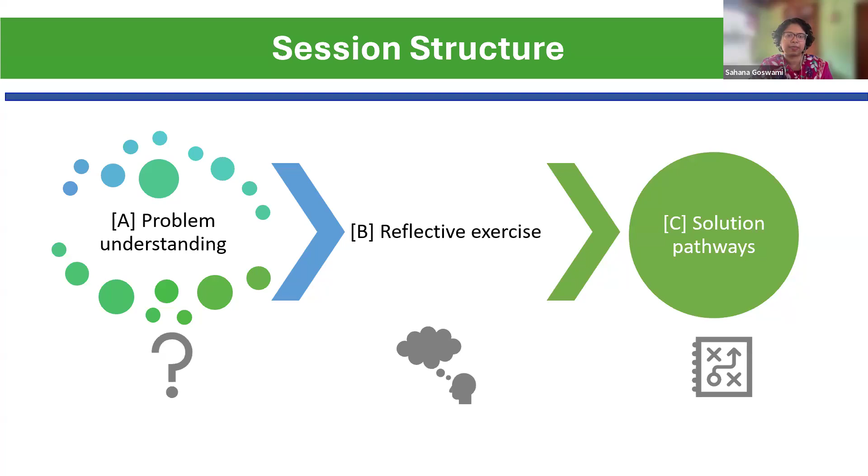To understand flooding in cities, we need deeper insight into how climate change, the water cycle, and urban areas intersect, impacting stormwater flows in surface and underground areas, both human-constructed and naturally occurring. At the nexus of climate, urban, and hydrological factors lie dense population centers, particularly in our global south regions, exposed to extreme rainfall and increased flooding due to impermeable surfaces, with subsequent exposure to water and vector-borne diseases from contamination of drinking water and sanitation services.

To delve deeper, when we talk of climate uncertainty with regards to climate change, this refers to the difficulty we have in predicting its consequences. Particularly with rainfall, which is the root of stormwater issues, we are limited in our ability to accurately predict when and how much rainfall a region will receive. This impedes people and urban system operators, like bus and transit operators, in being adequately prepared.

Climate change is also causing an intensification of the hydrological or water cycle. This happens in a variety of ways, but primarily we have warmer and wetter conditions across the world. Climate change driven global temperature increases are increasing evaporation rates and precipitation volumes. With more evaporation, there is more water held in the atmosphere, and the storms produced are highly intense and can cause extreme rainfall in many areas.

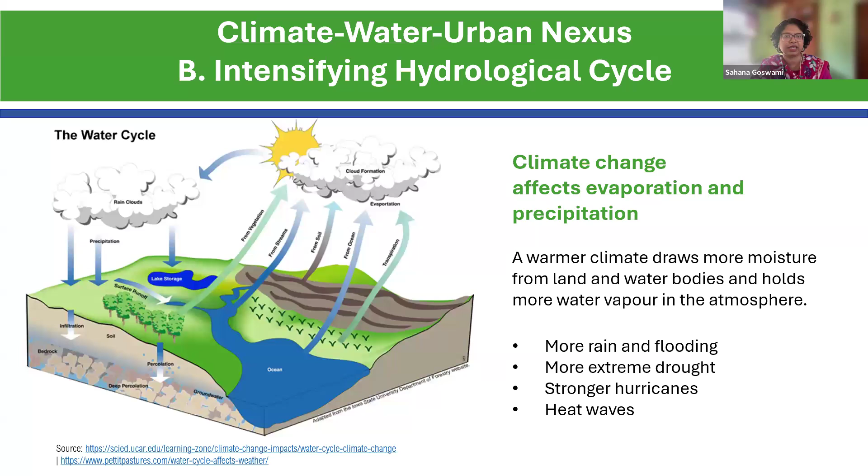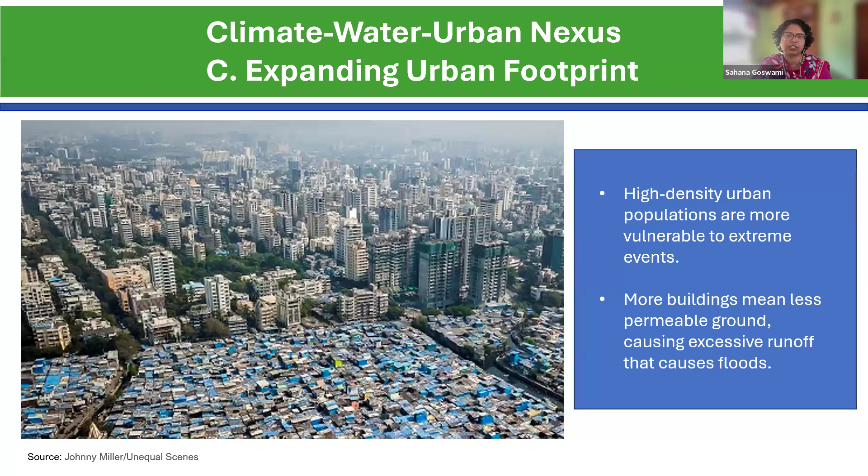The third layer we look at is rainfall falling on cities. Cities are concentrated population centers in relatively small areas, so we have really high densities. Because of this concentration, the number of people affected by an extreme event like a flood is very high. So one single extreme rainfall event, or multiple days of moderate to heavy rainfall, will impact a much larger number of people in dense urban centers compared to sparser rural areas.

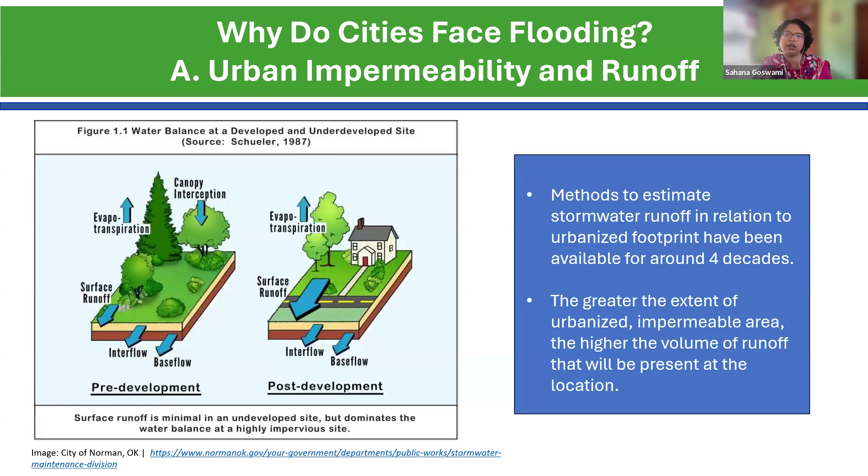Over the next few slides, I'll take you through exploring how the urban footprint specifically contributes to flood conditions in our cities. We start with impervious areas, the primary characteristic of most of our cities. This is all land area covered by buildings, pavement, roads, gravel, or any other material that will significantly inhibit how stormwater penetrates the soil.

A range of studies help us identify that the percentage of runoff generated is based on the type of surface. Not just tarred or concretized surfaces, but even compacted earth or bare earth, which you get after clear cutting woodlands or preparing a site for construction, also has very high runoff coefficients. This is a condition very common in our global south regions where cities are still being developed.

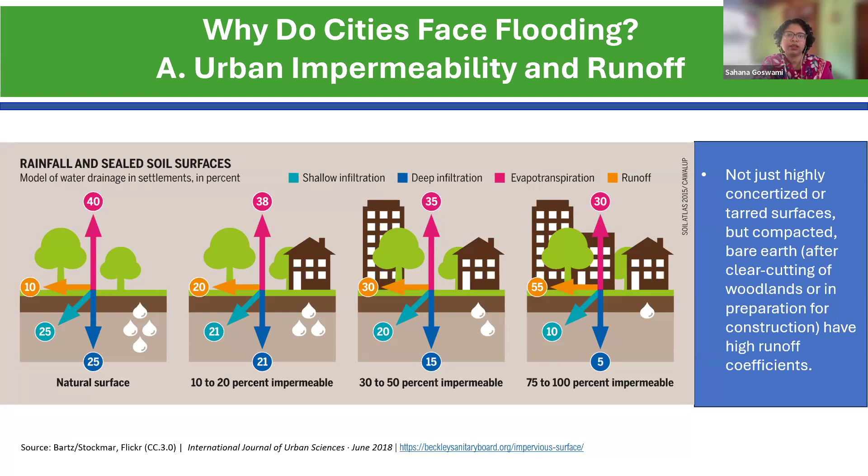Runoff coefficient is the number that compares the amount of runoff we see to the amount of rainfall. Essentially, it's a measure used in hydrology to understand how precipitation is transformed into runoff. The other terminology we often use is runoff peak, or peak runoff, which is the highest rate of runoff that will occur after a rainfall.

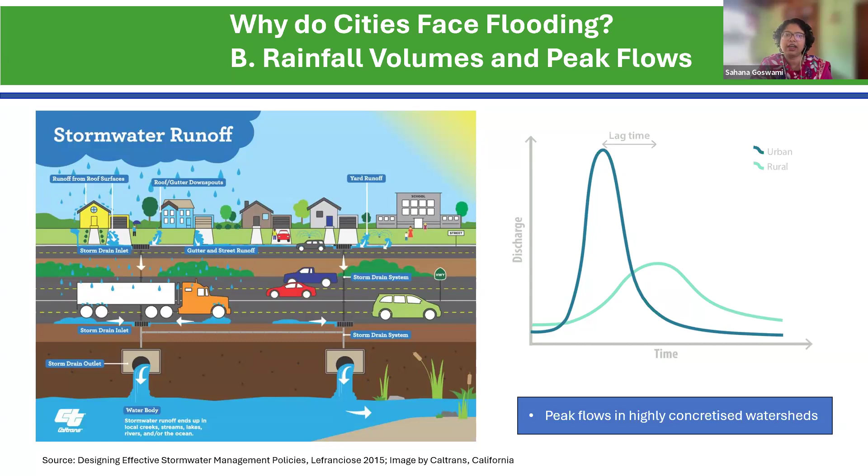We all know a lot of our urban development happens outside of our municipal boundaries. So this rapid urbanization causes more impermeable surfaces, leads to faster peak runoff and increased runoff volumes, and places an immense strain on existing drainage capacity.

Alongside erratic extreme rains and the impermeable surfaces because of our cities, a very fundamental reason for urban areas to flood is that we have built on areas where water would naturally flow or collect. It is very likely that all of us can think of neighborhoods called lake view, lake bed, or riverfront, which carry that name but where neither lake nor river is visible any longer, having long since been built over.

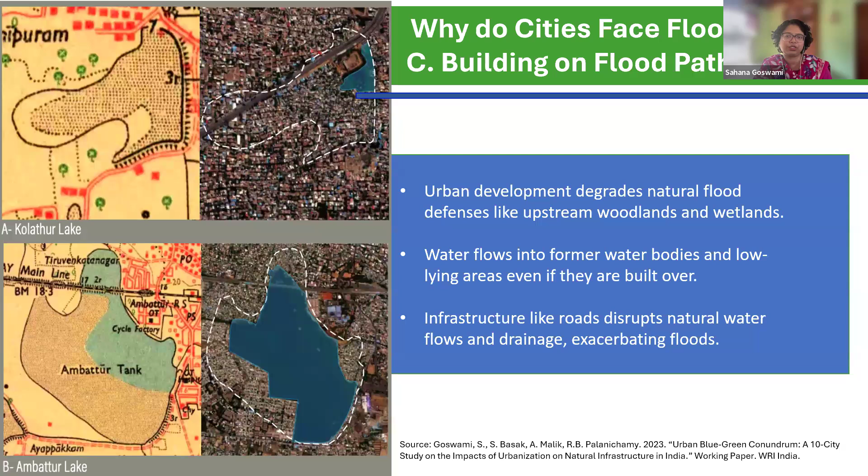As we look through the factors causing and exacerbating urban floods, we also have to learn about the ways people, communities, and infrastructure are impacted. Flood waters entering homes and businesses is only one way urban floods cause disruption. The most immediate and visible impact is loss of life and damage to property, but this is also bundled with impacts on education, as schools and colleges may be flooded, and livelihoods, as workplaces may be flooded, roads waterlogged, and floodwaters may sweep away school books and work tools.

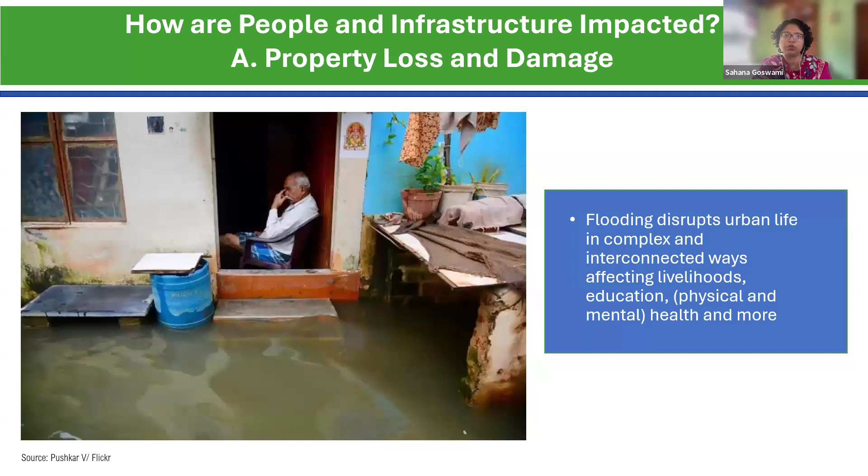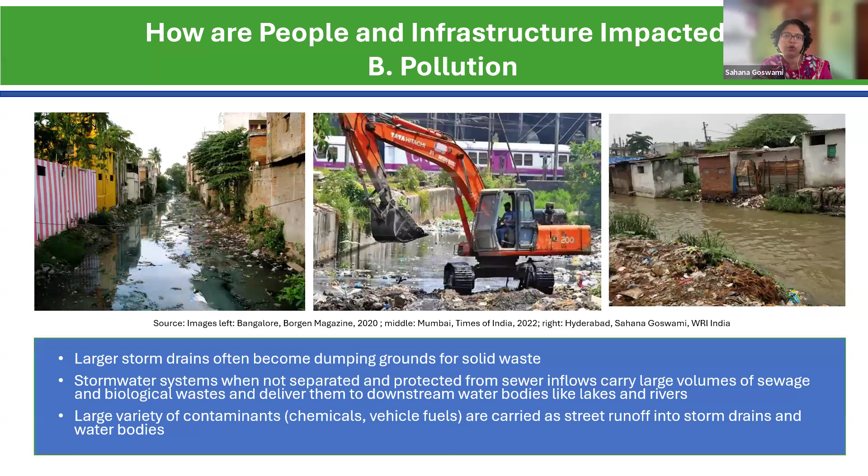In addition, combined sewer and stormwater systems, very typical across many of our cities, primarily in global south cities, lead to a decrease in the carrying capacity of drains. Solid waste is also a big concern in choking drains, requiring frequent and labor-intensive maintenance to desilt, primarily taken up before monsoons. These are images from Bangalore, Mumbai, and Hyderabad from the left, a very common problem across our cities, but removing commingled sewage is actually a much more intractable problem.

Now we'll change direction a little bit. Over the next few slides, we'll look at a major flood event from August 2022 in the city of Bengaluru, India, where I live, and reflect on the conditions that led to this situation.

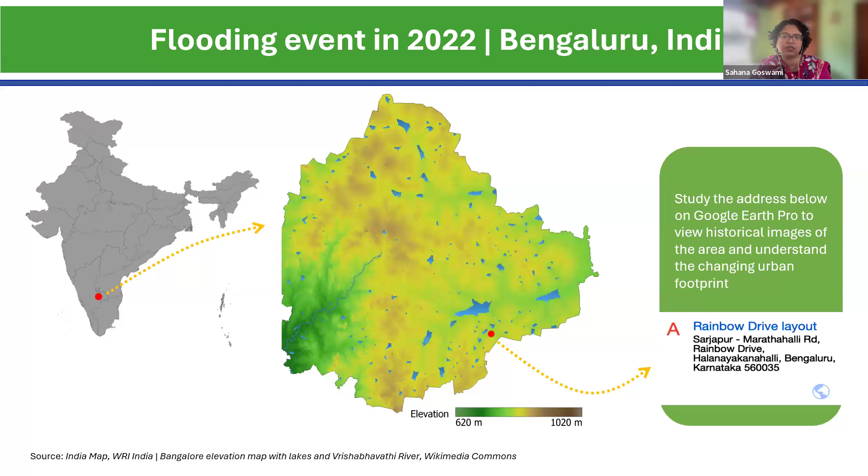Bengaluru is in southern India, fairly equidistant from ocean bodies. The city has undulating terrain, shown in the middle image, and is dotted with many water bodies. These were originally irrigation tanks for local villages, but have now become part of the urban fabric of the city, extremely diminished, depleted, and changed from their original form and characteristic.

In the next slide, we see a Google Earth image from 2025 of the affected region, with the red dot marking approximately where the photograph was taken from. We see about 5 lakes in the surrounding areas, marked in blue, green marking a lot of undeveloped land, and a fairly dense urban footprint with roads and buildings.

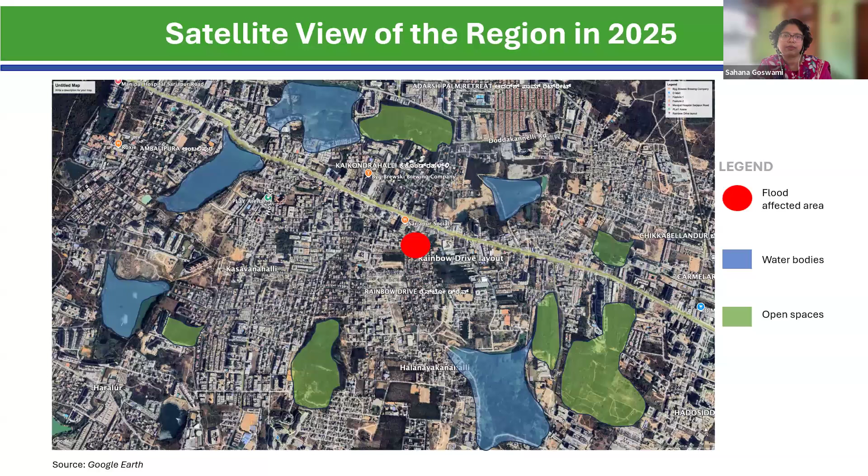If we go to the next slide, we see the same region in 2011, a little over a decade earlier, with a much sparser footprint and a lot of natural spaces between the lakes. So clearly there has been a change in the natural landscape.

The next slide shows an animation of how dramatic this change has been between 1995 and 2015, with topographic detail added, which clearly shows how built development, particularly in low-lying areas, has become a major contributor to the flood. If you go to the next slide, I'll pause for a minute to let you watch this.

Essentially what we have done is, ignoring the topography of the land, we have constructed in valleys and ridges, which in turn has altered the original hydrological networks. So the lakes today are isolated water bodies. Their upstream and downstream connections are compromised, often completely severed.

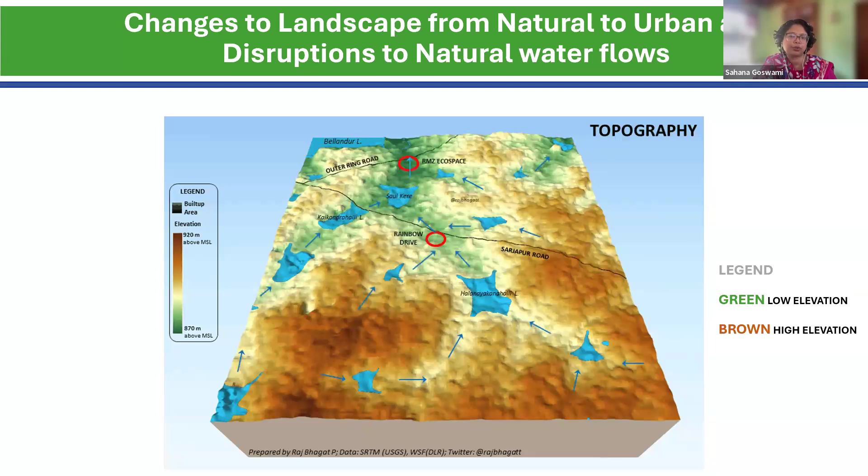The bulk of the flooding and stagnation in Bengaluru for 2022 was because of obstructions in these valley areas. There were very few instances of flooding outside for that particular year. But what we see from that is Bengaluru, like many other cities, when not underwater, is facing a water crisis. Availability of local water sources, particularly groundwater, drops during hot summer months. It's already happening this year.

So let us reflect a moment on what we are seeing so far. Many global south cities are increasingly grappling with that paradox that Mukta mentioned of having flooding and water scarcity, often simultaneously. And these extreme events are becoming more frequent, more severe.

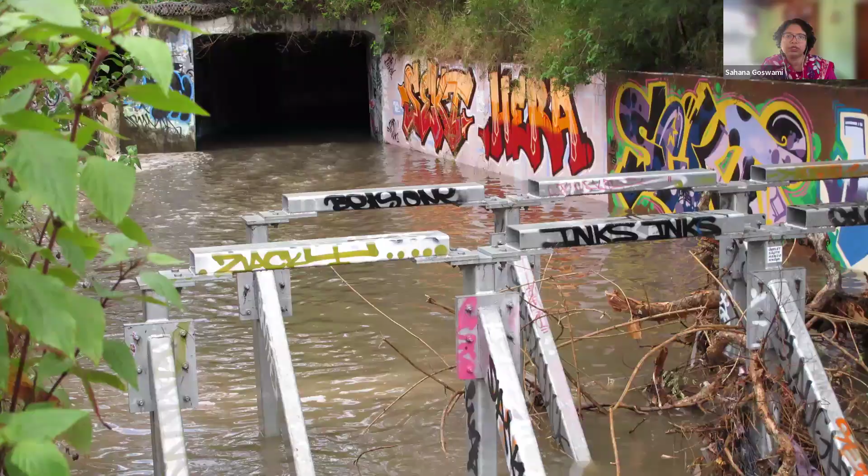What do we do then? How do we think of stormwater in this 25th year into the new millennium? Is there any way of devising alternate paths, or do we continue to build ways to drain water faster and faster away? What are the possibilities in the context of climate change? This is what we will try to explore in this next section of the presentation for another 15 minutes or so.

So first off, what if we were to reconsider how we think of stormwater? What if we thought of stormwater as a resource, which it is? And what if we thought of it as a resource to be conserved and used, and only drained away as a last resort? Only when excess waters that cannot be absorbed by vegetation or detained in water bodies or recharge aquifers, only that is let away.

So this revised stormwater management would concurrently look at flood mitigation and water security together, and put in interventions that would try to achieve both goals. We explored this possible path with these six processes that are laid out. This is a synthesis of various innovative practices we'll look through a little bit later.

In essence, what we do is address stormwater at every point of its journey from onto the surface of the earth to until when it drains away. We first talk of slowing the water, which is to reduce the force and speed with which stormwater hits the surface. Next, we detain, which is to hold water temporarily so that storm drains are not overwhelmed.

Or we retain, which is to keep water back for use. So anything from a rain barrel to a rain cistern to an underground rain tank, to be able to hold the water back for our use.

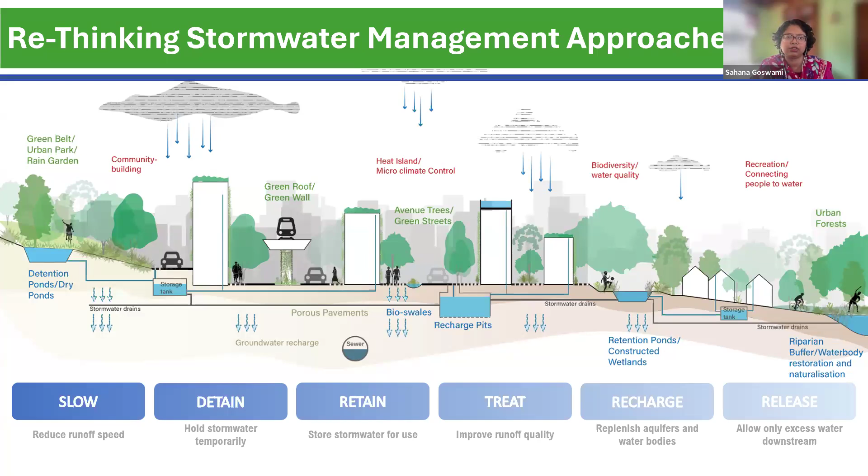There are various alternative pathways which actually capture this process, and we will look through a few of these. They do not depend solely on drainage, and there are many commonalities across these approaches.

So first off, what we talk of is the sponge city philosophy, which is very prevalent nowadays, and has been made widely popular in China. The intent here is to distribute and retain water at its source, to slow down water as it flows away from its source, clean water naturally, and be adaptive to water at the sink where water accumulates.

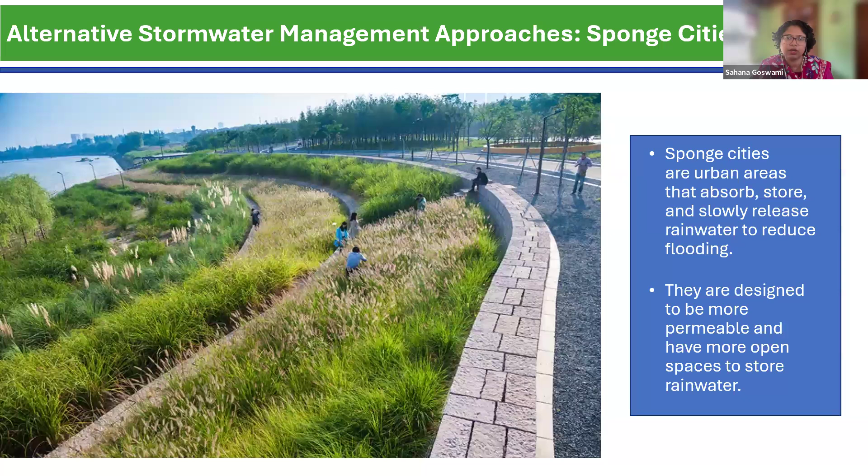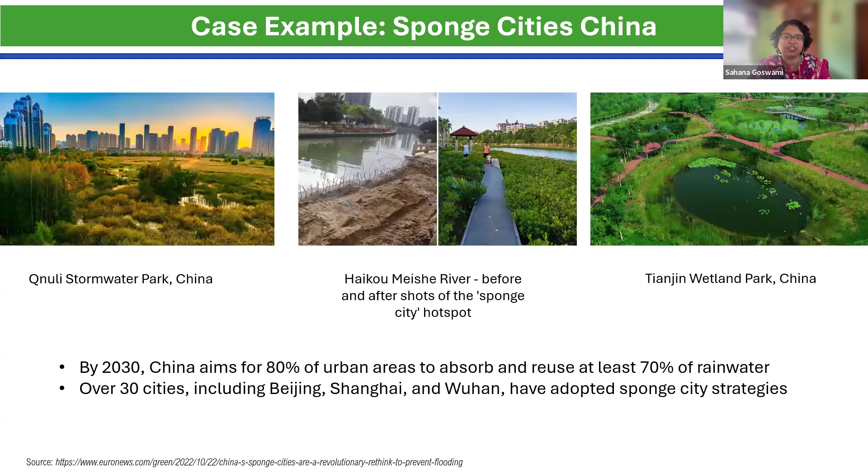This process is in stark contrast to the conventional solution of grey infrastructure, which was to centralize and accumulate water using big reservoirs, speed up the flow by pipes and channeled drains, and fight water essentially at the end by stronger, higher flood walls and dams. It is important to note that China, which is very focused on centralized solutions, is the one which has been promoting sponge cities so extensively.

Moving on from that, that fight with water is really the approach that the Netherlands used to have in managing stormwater and flooding, given their unique geographical context, until they moved to the Room for Rivers program. This is one of the most innovative flood management programs that are available or looked at globally.

Faced with the increasing threat of climate change and rising river levels, the Dutch government recognized the limitation of solely relying on higher and higher dikes. Therefore, the Room for Rivers program aims to expand the capacity of rivers to handle peak flows and reduce the risk of inundation in downstream populated areas.

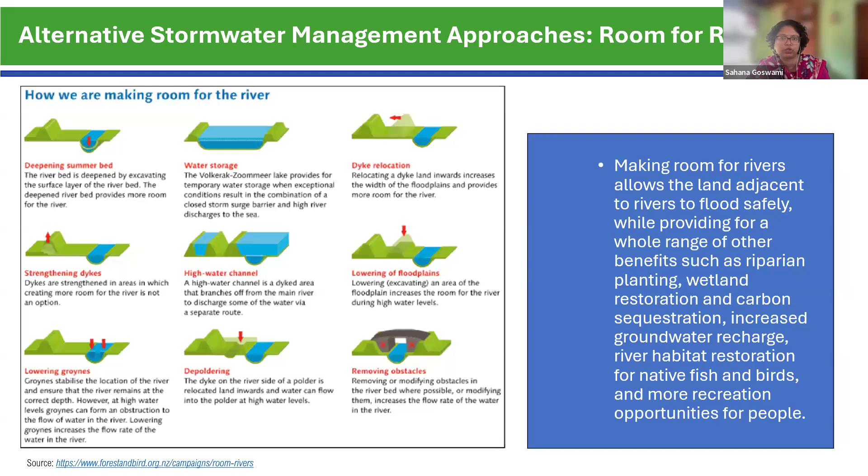The strategy involves giving rivers more physical space through a variety of measures, whether relocating dikes further inland, deepening flood plains and increasing water storage, creating side channels to divert excess waters, and so on. WRI India, in partnership with BMC in Mumbai, has been exploring this process for the Mithi River.

This is an urban river flowing through the city of Mumbai, and for almost its 17-kilometer stretch, the river is highly channelized. It was done as a flood risk mitigation effort, but what it has done is alter the capacity in various places of how much the river can take and absorb water.

The impact of this mismanagement is really borne by the people who live and work on this riverfront. Here we propose a reimagined vision for the river, finding spaces along it where openings could allow the river to swell during periods of heavy rainfall, and repurposing recreational land such as playgrounds, also called maidans, which can detain excess stormwater when the river surges, particularly because this submerges stormwater drain outlets into the river at this point.

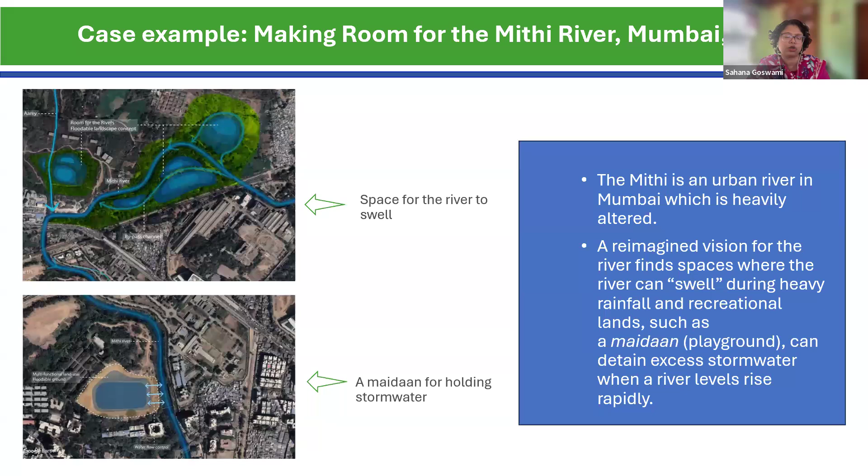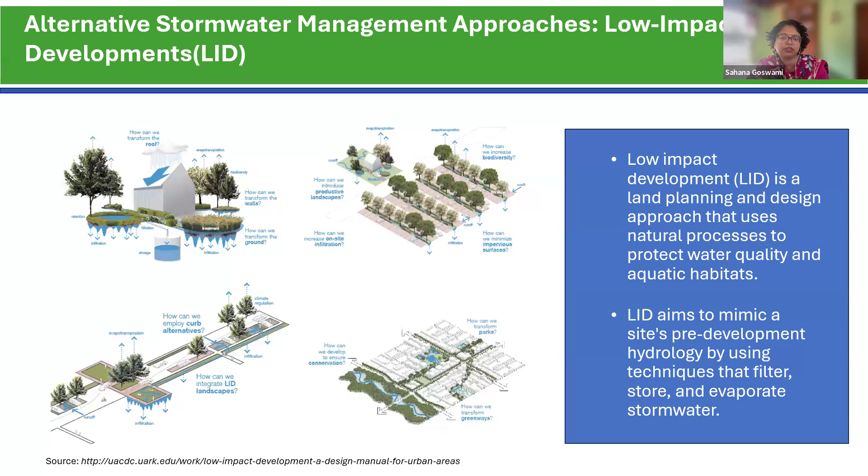Moving on from that practice is what we call low impact development. This is actually quite common in the United States, and it's a set of practices using natural processes to manage stormwater and reduce its impact on the environment. This is a site-level planning process for new constructions or redevelopments, trying to match the natural hydrology of the site in its undeveloped state to what the developed state will become, to minimize the effects of stormwater.

Another principle that's often used is water-sensitive urban design, drawn from Australian principles, who are really good at working with little water or managing stormwater on their continent. Through this practice, there are various design principles which give us opportunities to increase infiltration, increase groundwater recharge, and hold back stormwater to achieve more vibrant and healthy waterways and more livable cities.

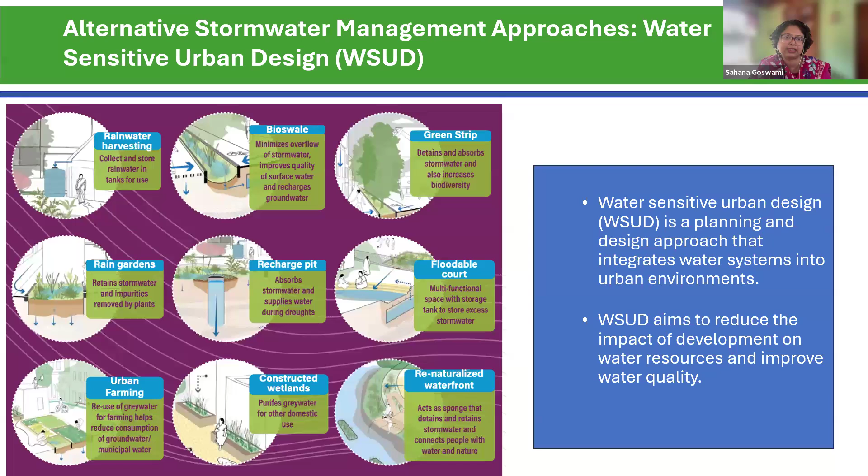Finally, we talk of sustainable urban drainage systems, or SUDS, something more prolific in the United Kingdom. This looks at a natural approach to managing drainage systems around properties and developments as an alternative to traditional drainage. They are designed to temporarily store water during storm events, reduce peak flows, and reduce surface water runoff, mimicking the natural cycle of water management by retaining water where it lands.

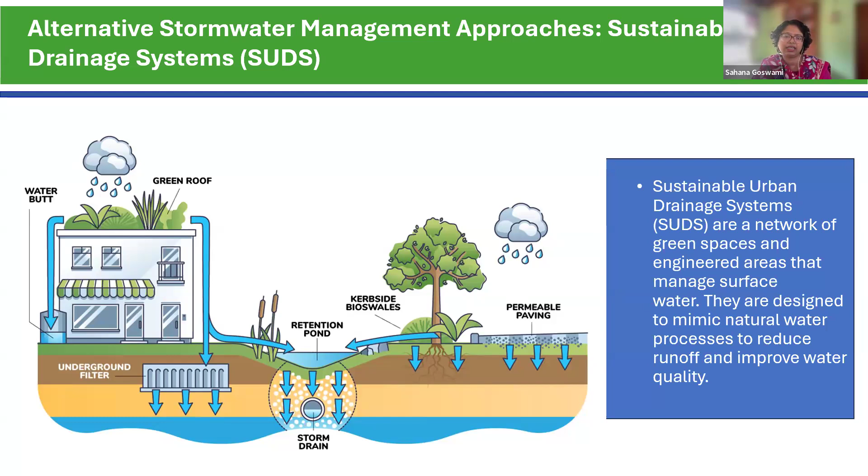While we have explored various types of approaches, scale is actually a big factor in responding to managing stormwater. So what size is the intervention, and at what scale do you administer it, is really something to explore further and understand better.

We begin with the largest scale, the watershed scale for interventions. This recognizes that urban flooding within a city's boundary is often influenced by factors way beyond the city limits. Instead of directing solutions only at the urban core, these interventions address the entire watershed, considering upstream and downstream interactions, reducing flows in upstream areas so that flooding in downstream areas is also reduced.

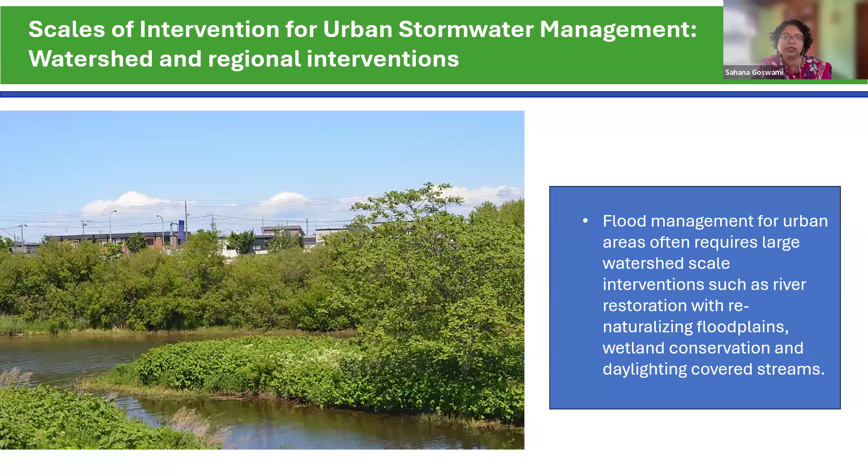The next approach is to look at it from a city network perspective. We talk of integrating blue-green infrastructure throughout the city in a network which will help mimic the natural hydrological process, reduce runoff, improve water quality, and so on.

Another alternative way of envisioning this network approach is to look at existing infrastructure networks, whether transit lines and so on, and to have blue-green systems or nature-based systems built along this. Imagine rainwater harvesting systems alongside metro lines or tram lines.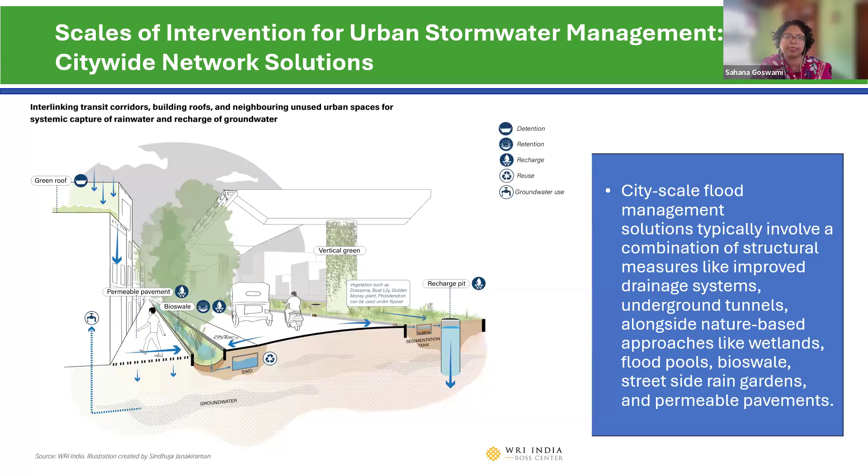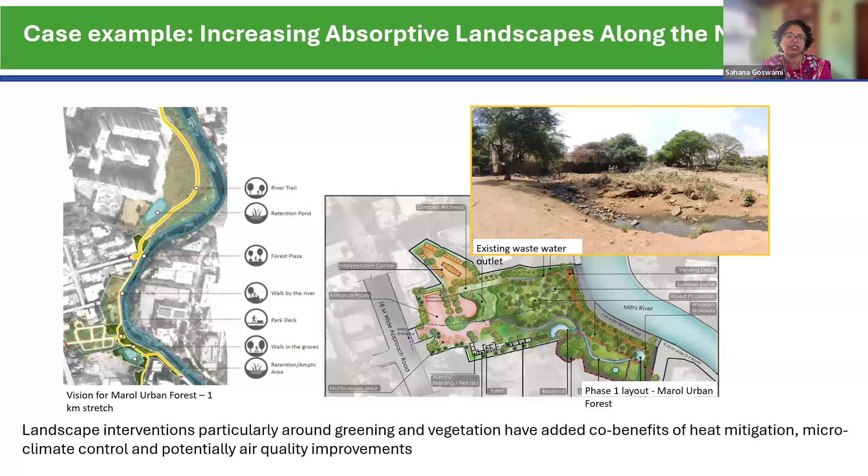One example, again from the Mithi River, partly because WRI India is doing a good amount of deep engagement over here, is building urban wetlands and bioswales, which help provide additional storage and slow down peak flows. While these are independent programs or projects, as you see in the photograph and the map, there's a larger vision of a much larger intervention at a network scale, where the entire hydrological network leading into the Mithi River will be addressed.

What we see in the next slide are these interventions of recapturing spaces along the river where water harvesting or greening can occur. From the photographs, you see that this not only helps reduce flood risk, but it can also enhance biodiversity, improve air quality, and create aesthetically pleasing urban spaces.

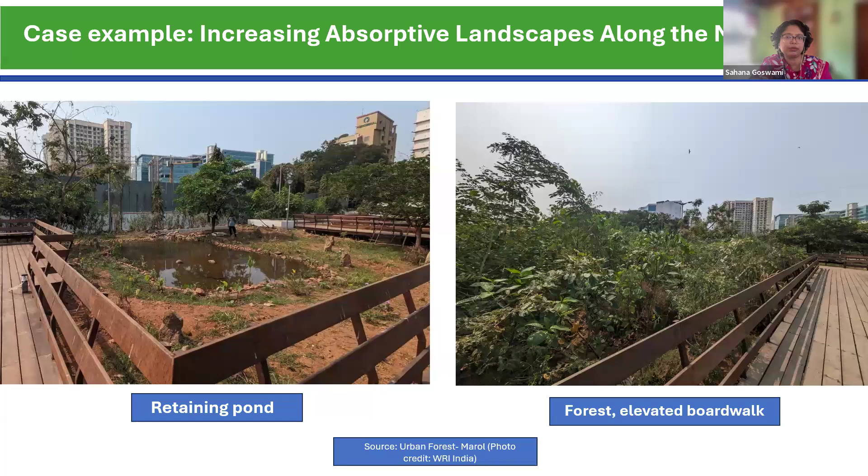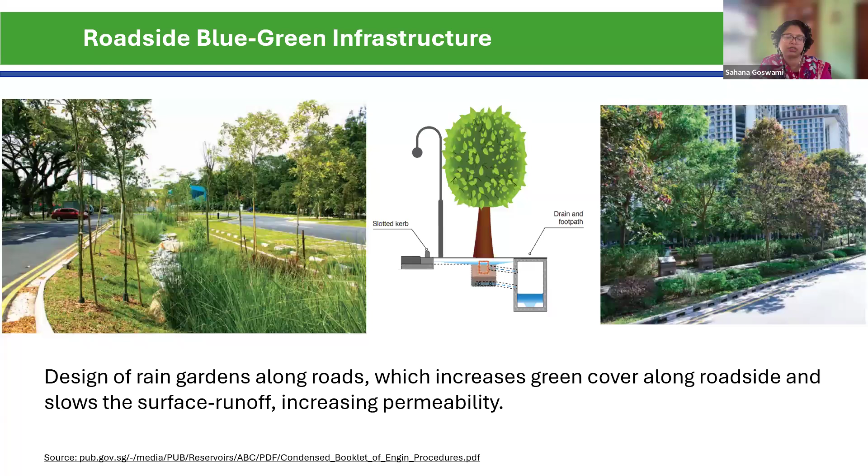Most important, in my opinion, is also looking at blue-green infrastructure along roadside design, because roads are across the entire city, in every part of it, and are one of the most important infrastructure, with a large percentage of our city systems designed around them. If we make these more resilient and sustainable through measures for reducing stormwater flows on the concretized surface of the road itself, this can improve the aesthetic and environmental value of our urban streets and reduce stormwater issues.

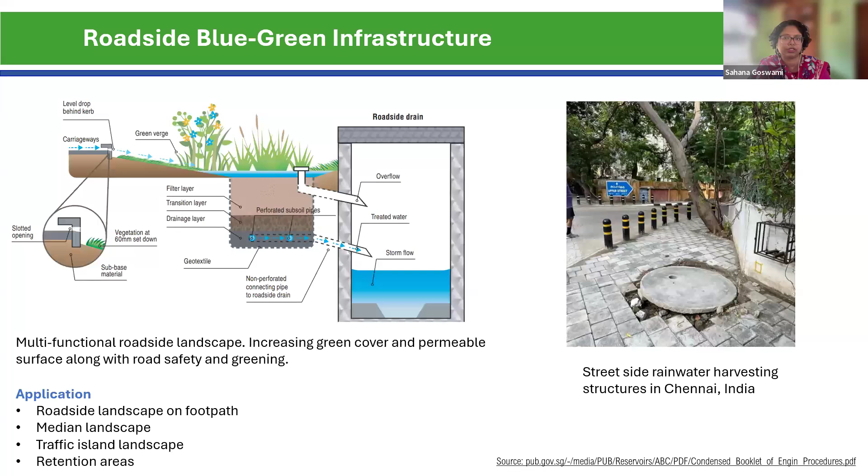We have tried this to a certain extent in the city of Chennai, India, where it hasn't gotten into all of the aesthetic parts. But as you can see in the photograph, it has really looked at flood hotspot zones and put in a lot of groundwater recharge programs in these hotspots. This has been driven by a really strong community who has championed the process with the city municipality as well.

Moving to a much more local scale of the neighborhood, many cities across Paris, Singapore, and New Orleans have transformed their existing open and vacant spaces, such as city parks or playgrounds, into water-prudent landscapes using blue-green interventions. This integrates nature into the urban fabric, increases biodiversity, reconnects urban dwellers, and at the same time becomes sinks for stormwater, able to absorb it at a neighborhood and decentralized scale.

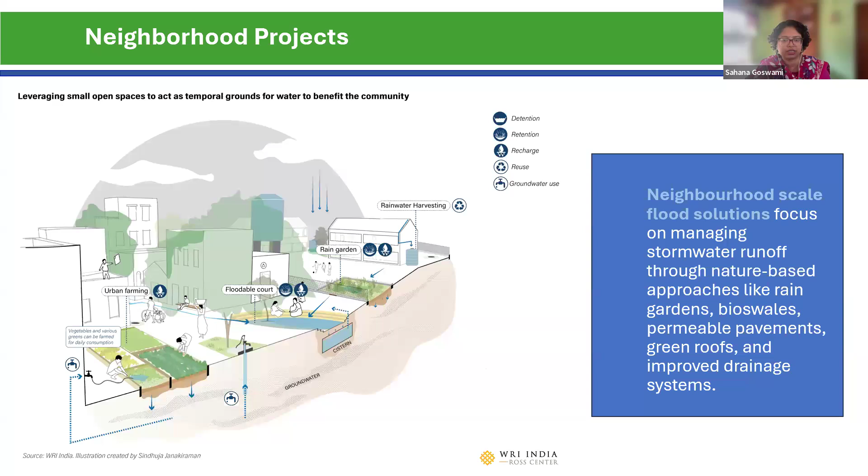We have an example from the Lallubhai Compound in Mumbai. This is a neighborhood intervention approach we are trying out there. It's a rehabilitation and resettlement colony facing a range of issues, with socioeconomic factors being a key driver. If you've watched the previous webinar on heat mitigation, you would have seen this showcased there as well. This really highlights the adaptability of nature-based systems, such as greening in this case, and its ability to provide multiple benefits.

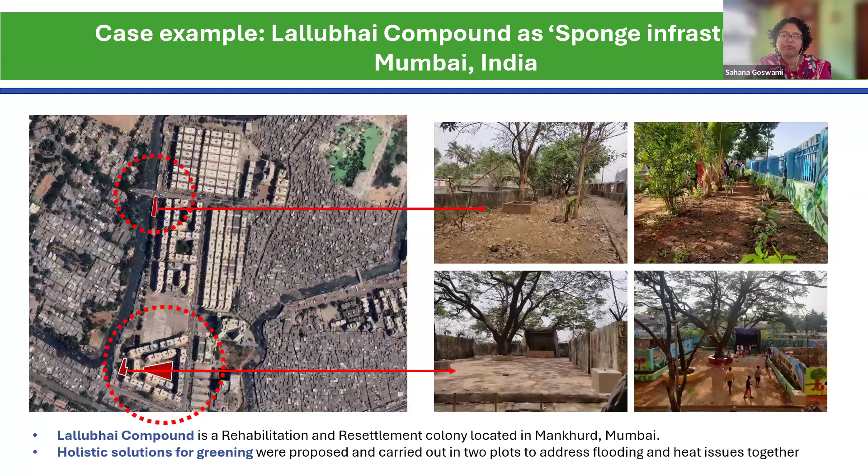Further, the use of natural systems also helps revive biodiversity and creates recreational space for the community, which is really needed here. If well designed and well maintained, it is really an asset for the community, which is deprived in so many other ways.

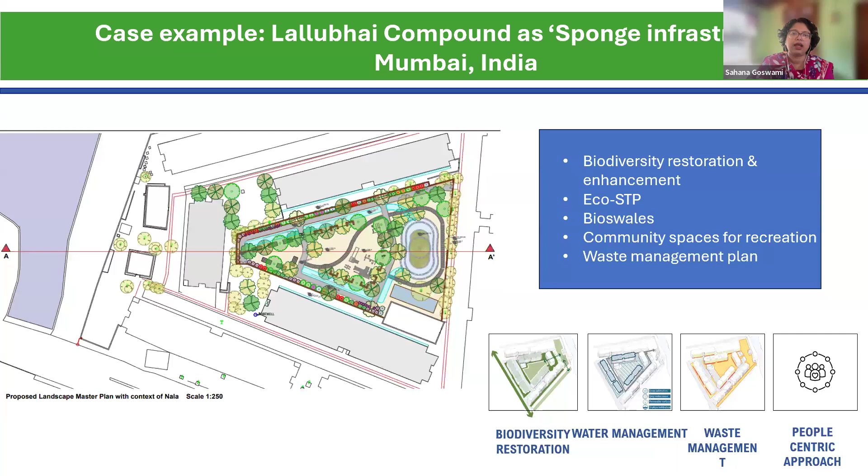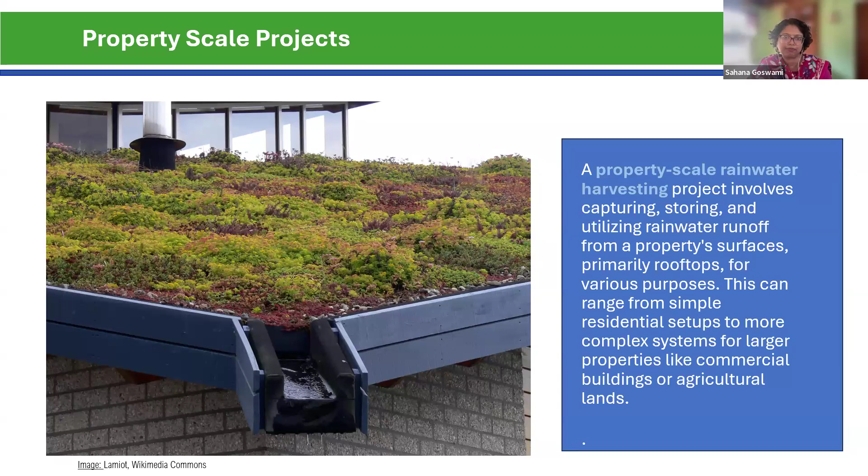Finally, at the scale of individual properties too, there are very simple measures, whether it's a rain barrel or a rooftop runoff capture system, to help reduce the strain on municipal drainage. These are particularly useful in large properties like institutional campuses or IT or business parks, because we can imagine a large volume of rainwater captured and diverted away from municipal systems and managed on site.

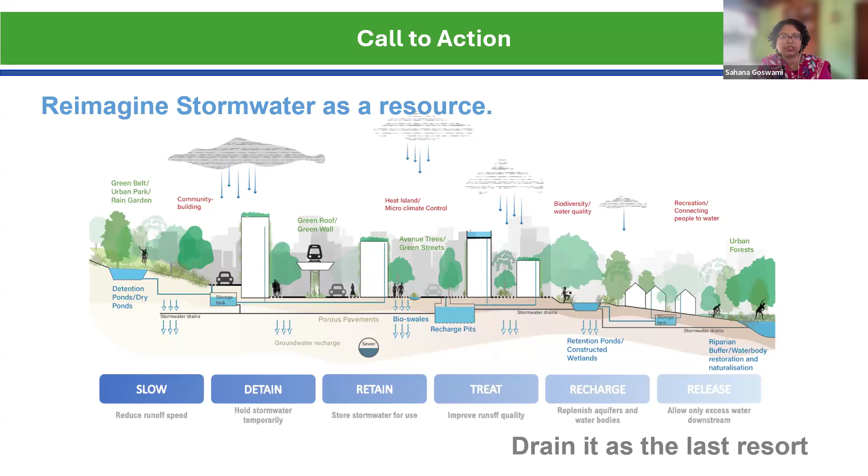I would like to close with the next couple of slides, and I want to end with a call to action. I invite everyone joining today to join us in this journey to rethink how stormwater is addressed in your city and neighborhood, to inform and transform city planners' approaches from stormwater drainage to stormwater management, and to think of stormwater as a critical resource that can underpin urban water security. In the next slide, I'll lay out some initial thoughts on how this call to action can be taken up by various stakeholders working to address or affected by urban stormwater.

First off, I call on urban practitioners. Whether you're in the field or in academics, you are at the very forefront of bringing together innovations and new practices. Maybe you're working on retention systems, maybe nature-based solutions, but we need to really test these solutions and evaluate their effectiveness across various rainfall scenarios, because this is evidence that is missing at this point.

The other aspect to explore is how these solutions can be added onto conventional drainage solutions and help augment their capacities. Because the reality is that when we look at our really large, dense cities, large drainage systems cannot be replaced. But as we are increasingly seeing, they are not enough by themselves. So by how much can they be supported with these nature-based solutions? We need the evidence for that to be really strategic and intentional in applying it.

To city planners and stormwater department officials next, I invite you to explore pathways and processes which will enable integration of all these unconventional practices that practitioners may bring in. Whether it is to update your tendering and procurement practice or to set up a stormwater lab which will help test new solutions for your city, if you can join hands with practitioners and communities to ideate on these possibilities, that would be a great step to look forward to.

And this is a repeat, but if there are ways to look beyond drainage, because what drainage does is fundamentally move a resource that is falling on your jurisdiction away to another jurisdiction.

Also, cities have a vast amount of private property. City codes and policies must address the flow of stormwater in these spaces. So whether it is incentives to increase rainwater detention on site, or higher fees when private property releases their stormwater into municipal assets, these have to be built into your city codes as well.

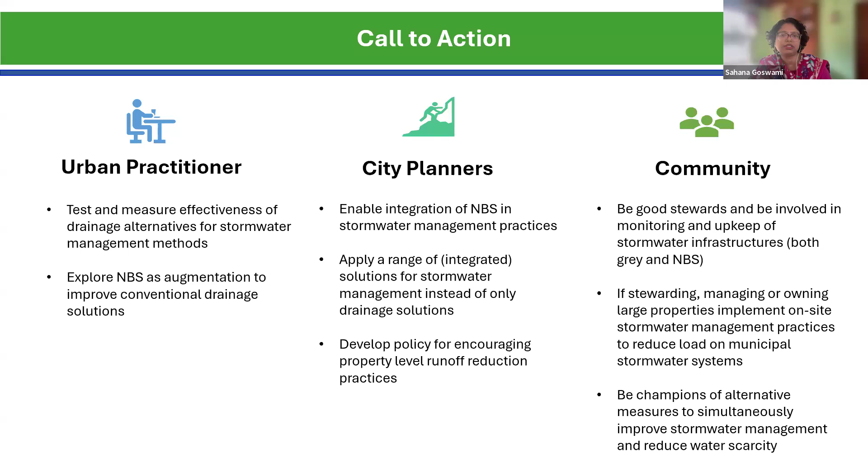And the final call to action is, of course, to the community stakeholders, who at the end are the ones facing issues with stormwater and have the most to lose, or possibly the most to gain. Can community become engaged stewards of stormwater infrastructure? Whether it is tending to local rain gardens or keeping storm drains free of solid waste, whether you are large property owners like campuses looking to improve on-site stormwater practices and become demonstration sites for safely keeping the maximum amount of stormwater on-site, and also become champions for the cause of integrated and holistic stormwater practices for your neighborhoods and for your cities. And with this, I end my presentation.

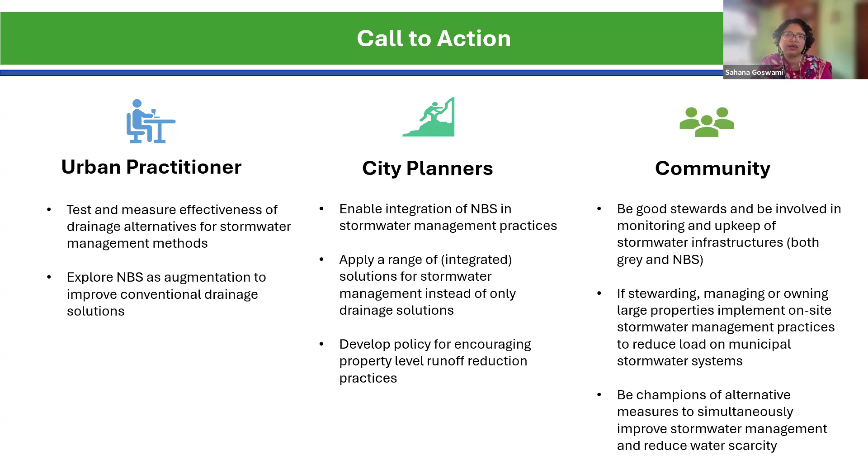Thank you very much, Sahana, for that really information-filled and well laid out session of the webinar itself. So just picking from what Sahana said, drain it as a last resort, and really a call to action for practitioners, city decision makers, and also the community. I think we definitely do not want to fight with water, and build a narrative across cities around the world to really live with water, because it's probably non-negotiable. So without further delay, I think I'd move on to the interesting part of today's session.

I'll just introduce the panelists one by one. For today's session, we have Dr. Nisha Priya Mani. She's a sustainable city specialist. She works with the Asian Development Bank, and she has over 15 years of experience in building natural infrastructure and healthy cities conversations across different parts, different cities in India as well. Thank you, Dr. Nisha, for joining us today.

I would welcome in next, Ibu Meslin Maibu. She's head of the Environment Pollution Subdivision, City Environmental Agency, Jayapura. Thank you, Meslin, for joining us today.